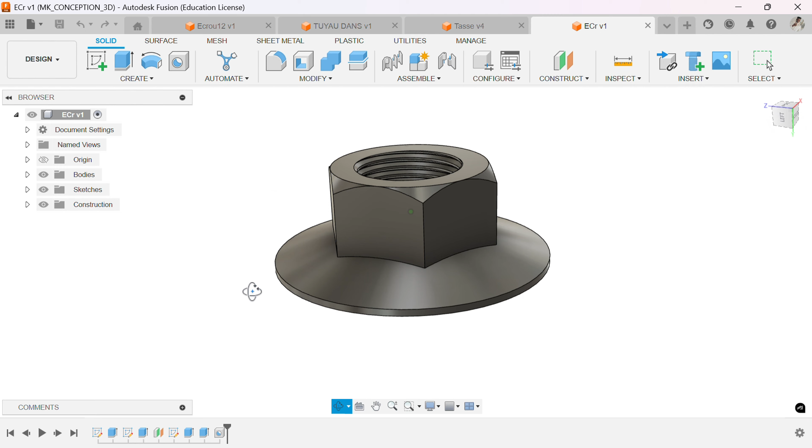Hello everyone, today we are going to learn how to design this nut on Fusion 360. So let's open a new design. In this new design, we are going to create a new sketch on the top plane.

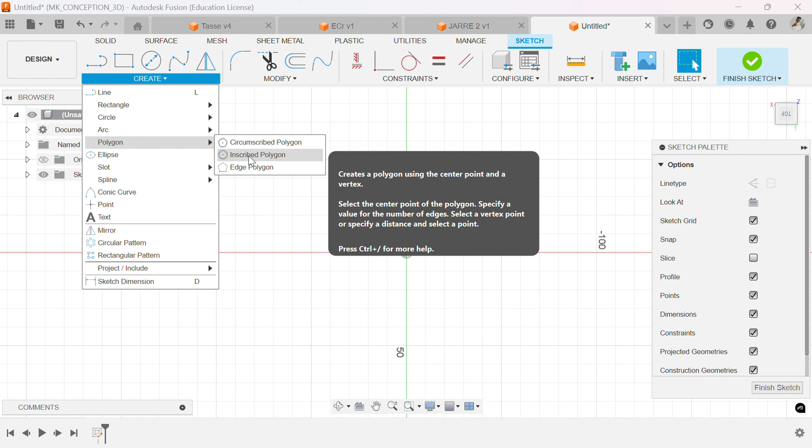In your new sketch, go to create, select polygon and select inscribed polygon. Go to your center point, select and move to draw your polygon. If you want to change the type of your polygon, you can press tab on your keyboard and change the number of lines. If you want, you can give 10 or another. I will keep 6, and you can give the dimension like 50 and say okay.

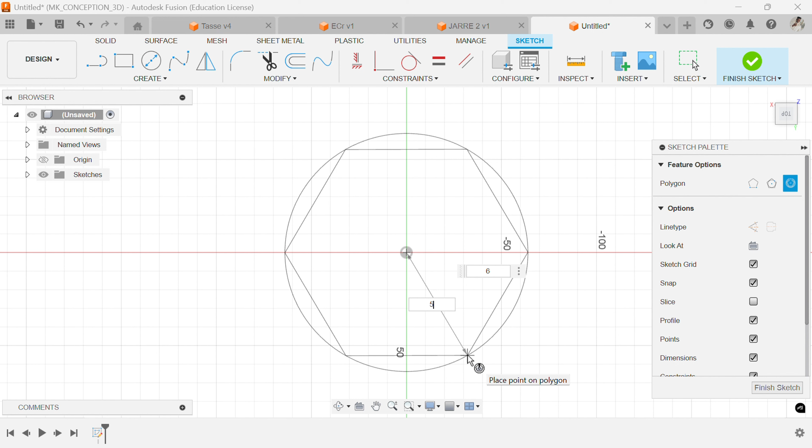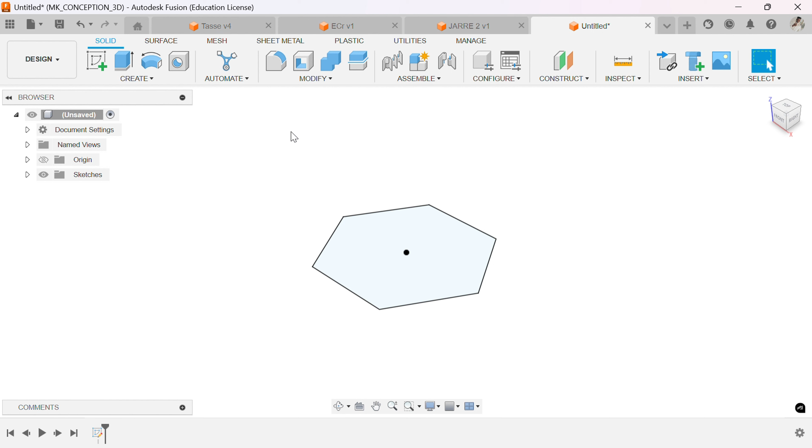Here you can see your polygon can move like this. So go in constraint, select vertical or horizontal and select this line. If you do that, you can see your sketch will change to black and it cannot move. Go and select finish sketch, and we are going to extrude this sketch.

So in create, select extrude and move to enter your dimension like this. You can enter any dimension that you want. We are going to give 14 as the dimension. So now select this face and create a new sketch again. This new sketch will be a circle.

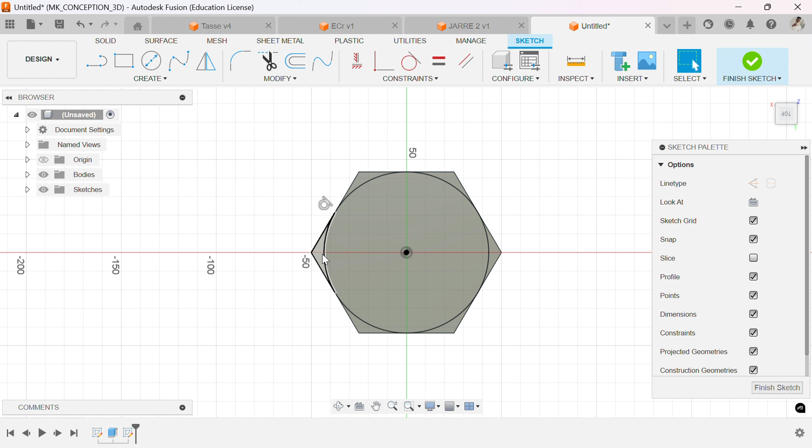So select circle, go to the center point and move to draw your circle. We don't need to give any dimension. We just go in constraint and select tangent. Select your circle and select this line. You see your circle is tangent to this line and it's automatically constrained. So finish your sketch and now we are going to extrude this circle again.

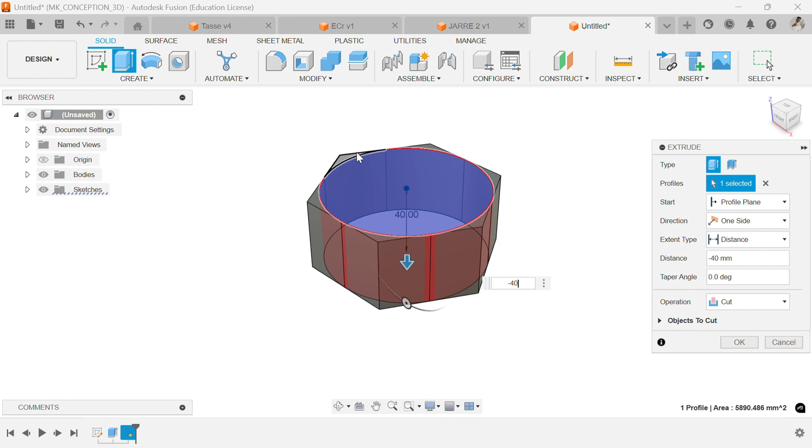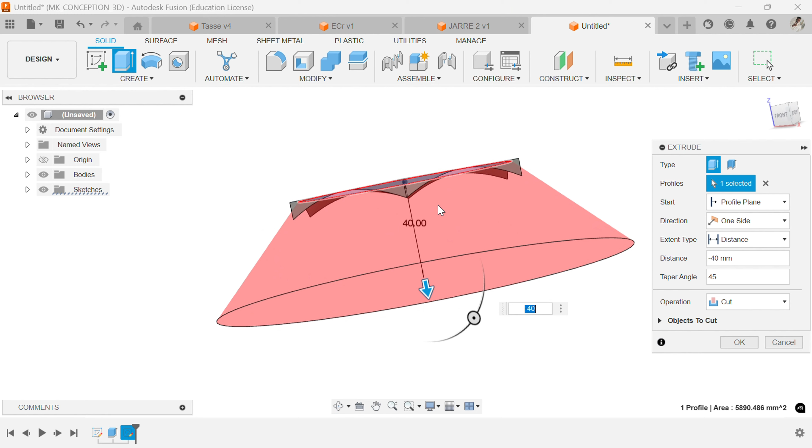Select your face and move to remove the material, but in distance we are going to give just minus 40. If you do that, you see it removes the material, but here in your angle you just change this angle to enter like 45 degrees, and you see it removes material again, but it turns to a conical shape, but we don't need to remove all the material.

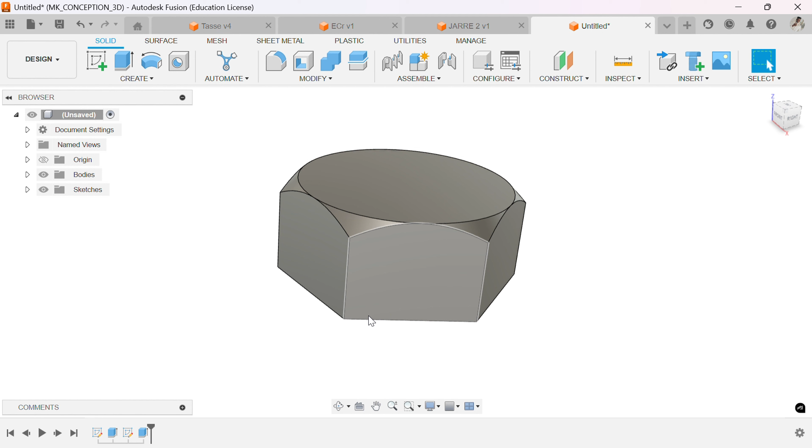So here in operation, instead of cut, select intersect. When you select intersect, you see it changes and gives the nut shape. So select OK, and we have one part of our nut. So now there remains this lower part.

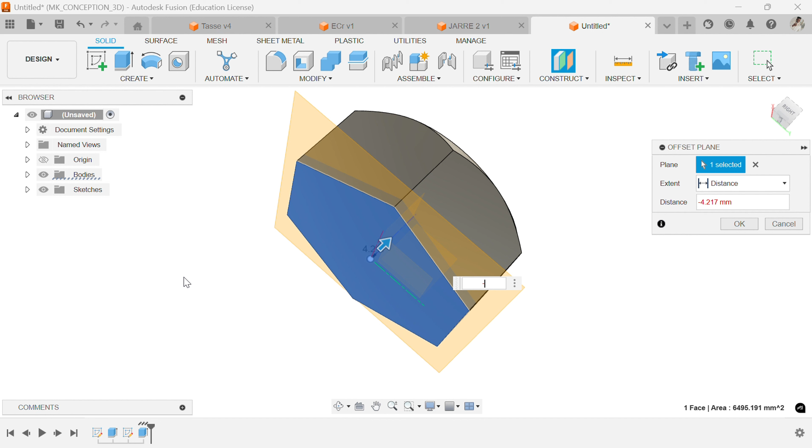To do that, we are going to create a new plane. So come here and in construct, select offset plane. Select this face and move like this and enter dimension minus 4 for example, and say OK. Select your new plane and create a sketch in this new plane.

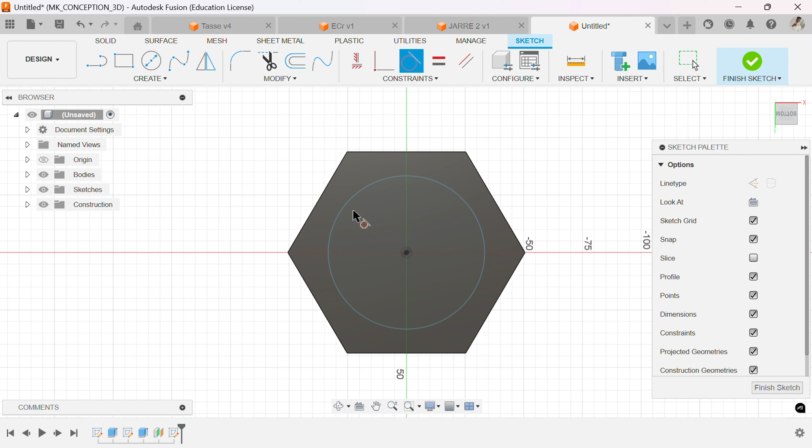This sketch will be a circle again. Come to the center point, select and move, but you don't need to give any dimension. Go to constraint again, select tangent, select this circle and select this line. You see it will immediately constrain. So finish your sketch and select extrude.

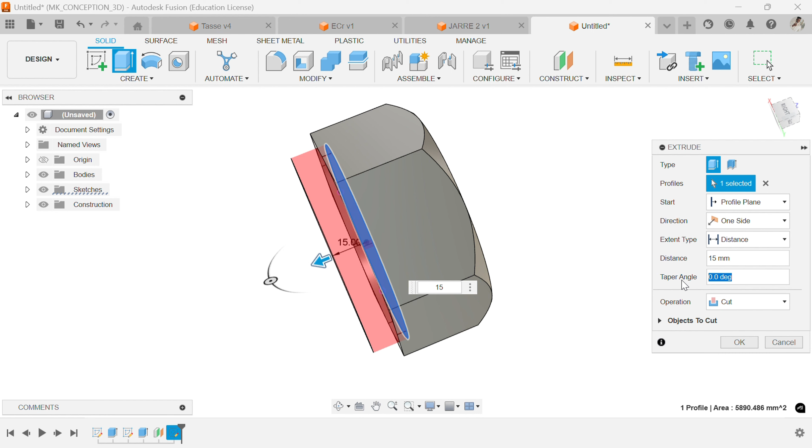So you can extrude, but if you do that, it removes the material, but it's not a problem. Just move and you can give the dimension like 15, and in taper angle change the angle again. You can give like 70 degrees, and you will see it gives a conical shape again, but it removes the material. So in operation, select join. If you select that, you will see we have our nut.

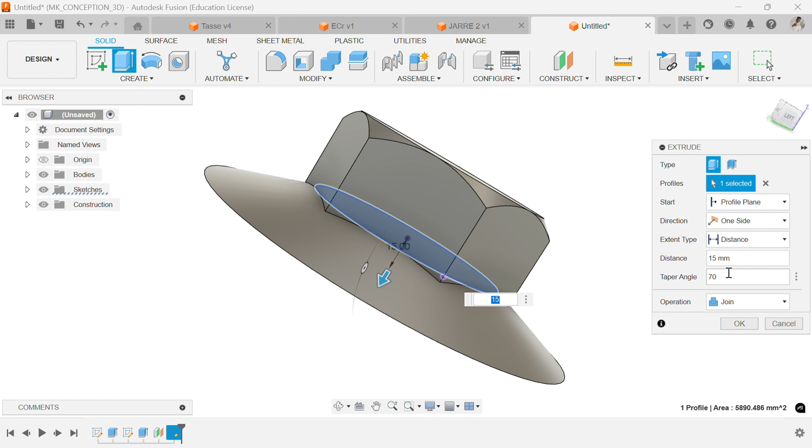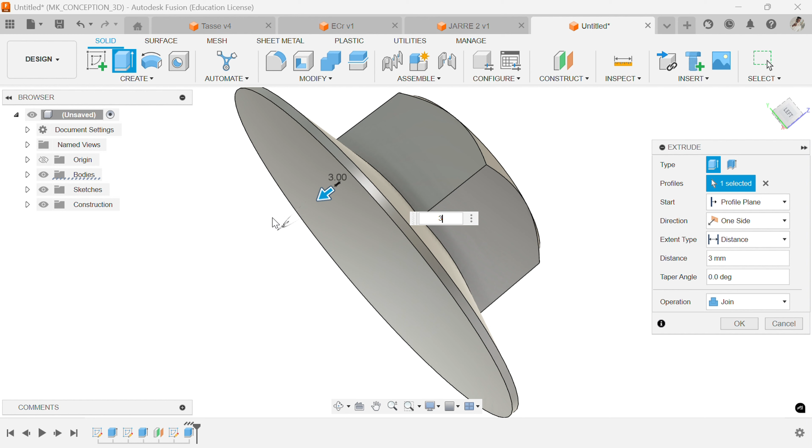If you want, you can change the distance, and here you can change the angle again, but I will keep it like this, and I say okay. Now this part is not very good, so we go in create and select extrude, select this part and extrude it to give just a small dimension like 3, and say okay. If you do that, your nut is almost finished.

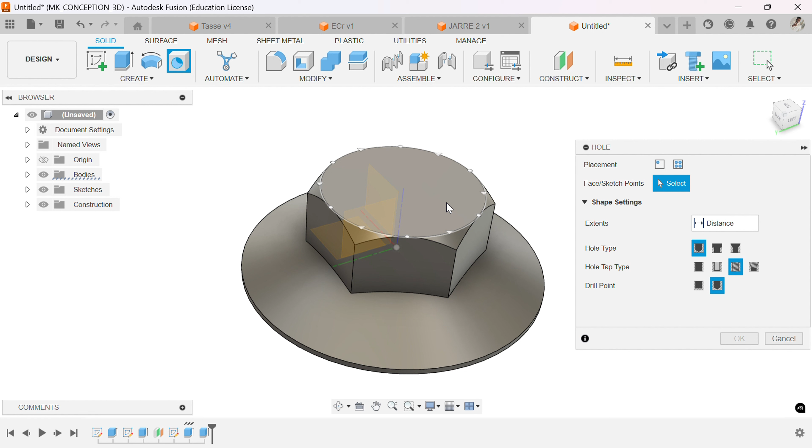It remains just to do the thread here. If we do that, our design will be finished. So go in create and select hole. When you select hole, select this face and move your hole to the middle point. When you do that, you have here hole type. You just keep simple, but for hole tap type you have to select tapped.

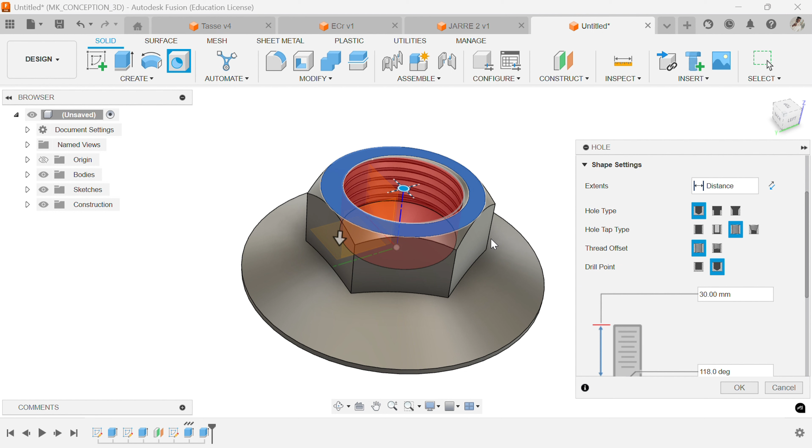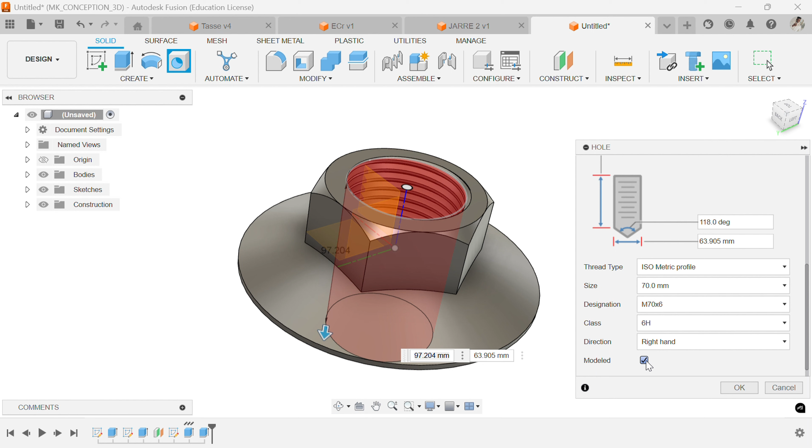If you select this, you can see it makes a hole and thread at the same time. Select this snap point and move to remove all the material. If the size of your tap is not good for you, you can just change it here. You can select another size as you want, and don't forget to select modeled and say okay. So now our nut is finished.

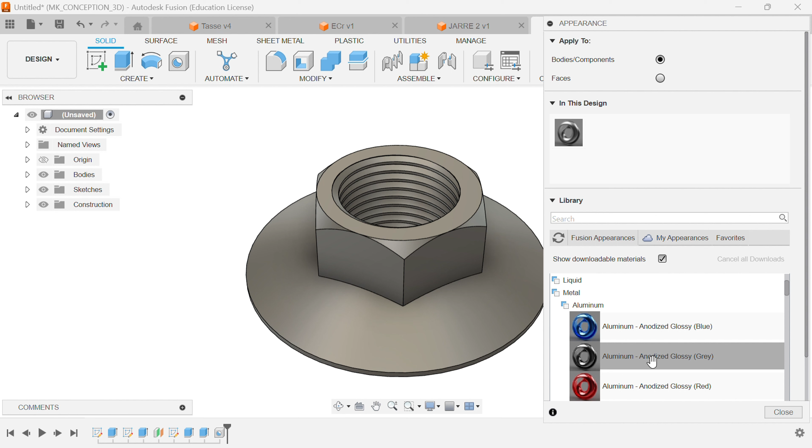If you want to change the appearance, you can just press A on your keyboard or go to modify and select appearance. In the appearance, I want to take aluminum and drag this onto my nut. So now our nut is finished.

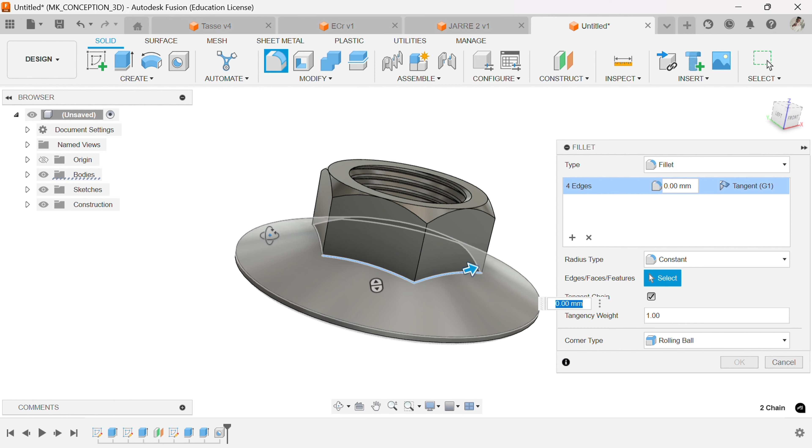If we want to do some fillets here, we can go to modify, select fillet and select this line, this part, select again this line, and select this line and this line. You can enter like 1 or 2 for your dimension, and it will appear automatically.

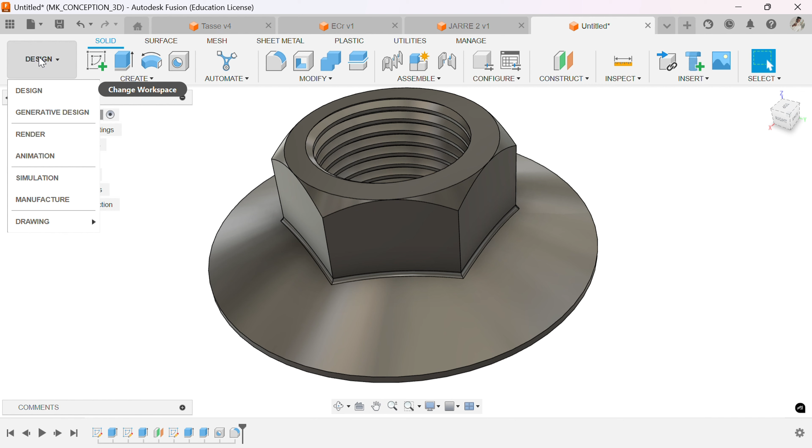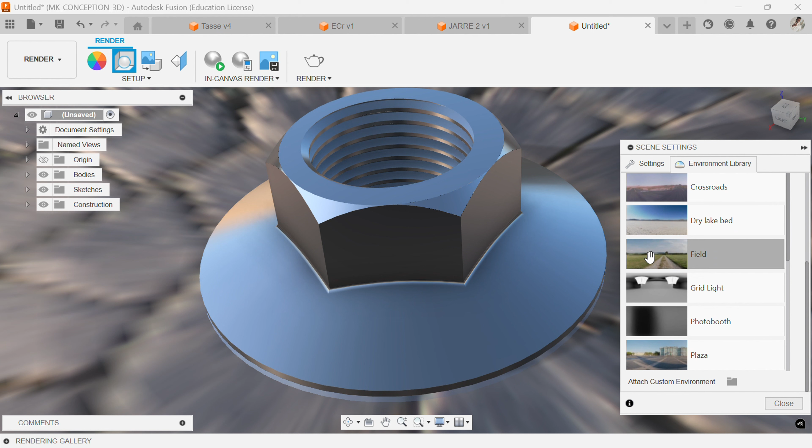If you want to see your nut very well, you can click on design and take render. In render you can take scene settings, select environment library. Go in this and you can select any environment that you want. You can select like this environment and move it here.

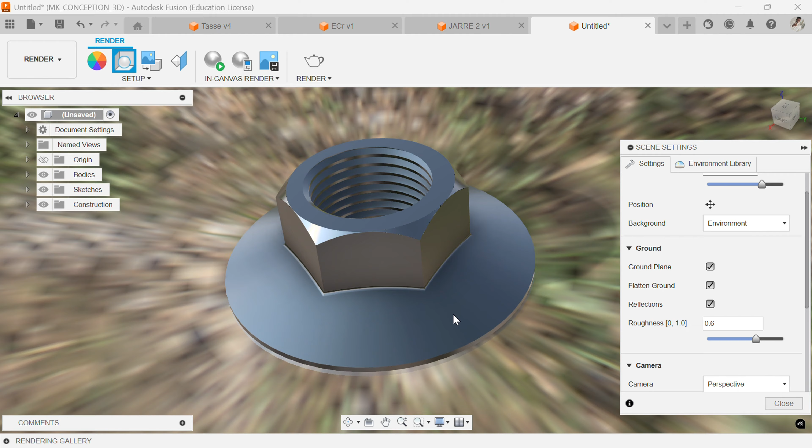And in the settings, don't forget to select background environment. If you don't select that, you will see it does not apply. So select this and you will see your nut in another environment. That's good. So I think it is good, and when you finish, click on close.